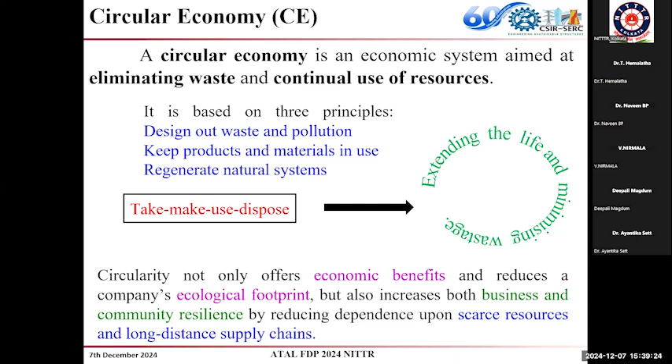The next point is how we can extend the life or keep resources alive. If we are able to do this, we can move towards the circular economy. The difference between linear economy and circular economy is: in linear economy, we make, use, and dispose it, which leads to huge waste generation. In circular economy, by all means we want to reduce waste and extend the life of the structure or material. That is the difference between linear economy and circular economy.

Circular economy as a term is only new, it is not a new concept. Whatever we have, like dress, chappal, utensils, if it goes bad, we used to try to repair it and use it. Plastics and other materials are recycled and made into different materials. So there is no newness in the concept, only the term is new.

But circular economy is a little beyond recycling. In linear economy, it is take, make, use, waste - it goes as waste. In recycling economy, it is take, make, use, and at a certain stage it can be recycled, extending the life of the material or structure to some extent. Whereas in circular economy, there are many concepts in which the material can be in use for a long time.

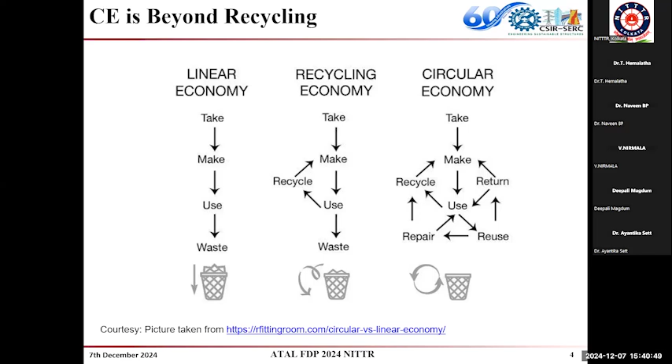If we go to the next slide, we can see what I mean by circular economy. In a recycling economy, it is only recycling. In circular economy, the material or structure can be in use through different means - like when materials are recovered after the end of life of products, and made into another material through recycling. Another term is remanufacturing, where disassembling happens at the component level, then it can be assembled again to become a new product.

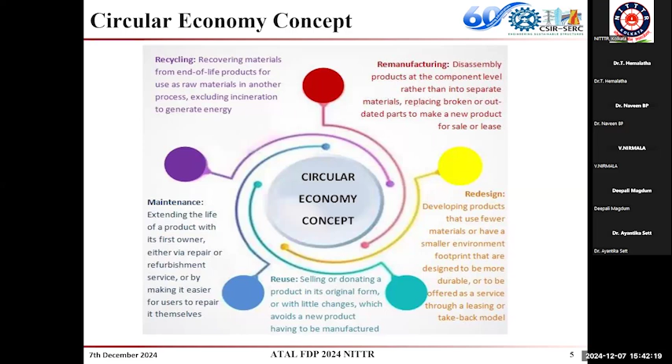Different concepts are in use now - redesigning, reusing, and maintenance, refurbishment, remanufacturing. These are some of the terms. There is a very narrow difference between each of them, and repair - everything comes under circular economy. The entire concept is, instead of just throwing things out, whether it can be recycled, reused, or repaired, the life of the material or structure can be extended. This is the main idea of circular economy.

In modern days, if you ask your parents or grandparents, if something went bad like TV, shoes, dress, or electronic gadgets, earlier we used to repair and use it. But nowadays, instead of repairing, we go for a new purchase. This happens for two reasons: one, nowadays the volume of manufacturing is high and affordable, so the cost is affordable, and repair is costly.

The skilled labor for repairing products is very less. It is like vice versa - we are not encouraging repair, so the skills for providing repair are less, and because skilled repair people are not available, we are not going for repair. So it is vice versa.

What happens is, not only are we spending more money on buying new materials, but if we consciously see, we are generating more and more waste. Ours is a most populated country, and we don't have space just for dumping waste. So the circular economy concept is very much useful, and we have to follow it in a developing country like India to convert waste as a resource.

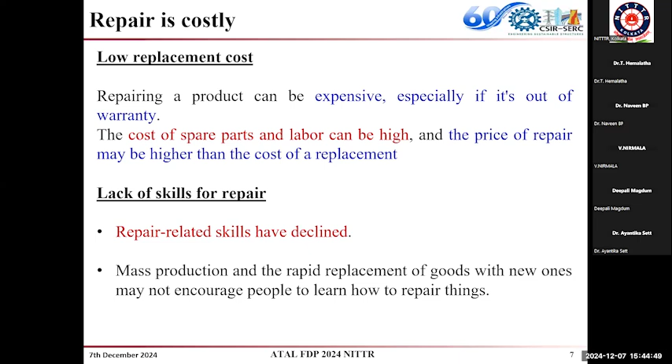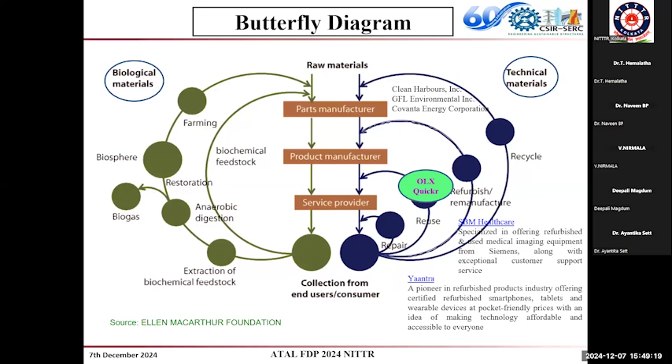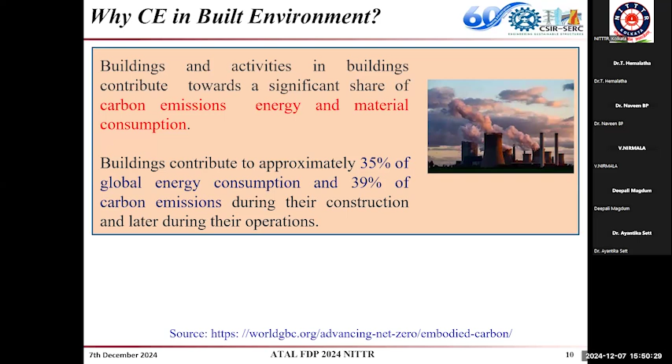So why circular economy is very important in built environment? Because buildings and the activities of buildings contribute towards a significant share of carbon emissions, energy and material consumption. Buildings contribute to approximately 35% of global energy consumption and 39% of carbon emissions. That is why, as a structural engineer, I have to say that we are more devastating to the environment, because construction industry, or concrete industry in particular, is contributing to waste generation as well as higher amount of emissions.

Concrete is the second largest material consumed in the world next to water. If you see the ingredients of concrete - cement, fine aggregate, coarse aggregate, water and steel - this is why I am saying concrete industry is contributing more towards environmental degradation. These are the conventional ingredients required for making concrete.

Nowadays we have different special types of concrete where we add other new materials for getting required functions. First, if I take cement, almost for manufacturing 1 ton of cement, it produces around 1 ton of carbon dioxide. And India is the second largest producer of cement, so we can imagine how much carbon dioxide emission is created only by the cement industry.

Coming to fine aggregate, the conventional fine aggregate is river sand. Nowadays we have alternate fine aggregates like manufactured sand, because we are running out of river sand. I'll show slides of how sand mining has devastated the environment. Similarly, coarse aggregate is quarried from mountains, so each ingredient of concrete contributes to environmental degradation. With attention to all these ingredients, we have started using Portland Pozzolana cement, slag cement, and other materials in terms of moving towards circular economy.

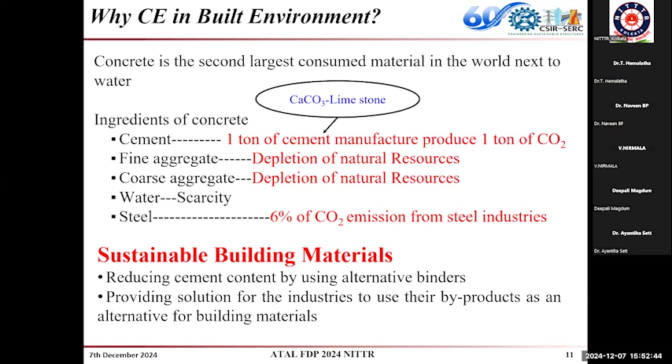So this is to show that industrialization is giving CO2 emission and also generating waste. So these are the two major problems of the industry. And if we take the built environment, steel making produces around 6% of CO2 emission, whereas cement manufacturing 8%. So India is the fourth largest emitter of CO2 and second largest producer of cement and steel.

So when we are able to find an alternate for ordinary Portland cement, then we can reduce the carbon dioxide emission coming out from the cement industry. So now, as I said, this concrete is made up of fine aggregate and coarse aggregate. Have you ever thought what is the origin of the raw materials going into construction? It all requires mining, logging, and other processes.

So why we have to worry about the built environment is because the construction industry is responsible for over 30% of extraction of raw materials and at least 25% of the waste in the world. And when buildings reach the end of life, only 40% of the material is recycled and reused. So we should be aware of the problems coming from the construction or concrete industry, and which can be altered, which are in our hands to reduce this kind of

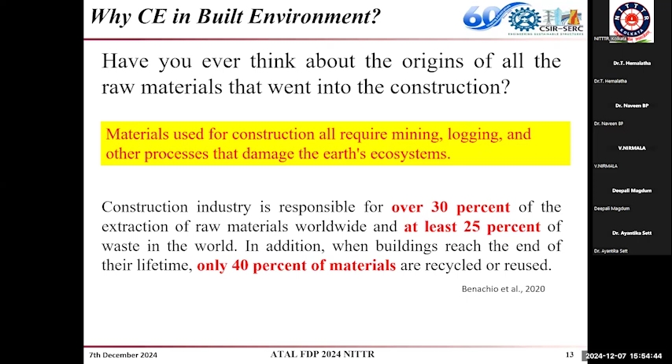degradation to the environment. In a concrete, around 70 to 80% of the volume is occupied by the aggregate, both fine and coarse together, and both fine and coarse aggregate are from natural resources. So this is just to show how we are degrading the environment or natural resources by mining sand.

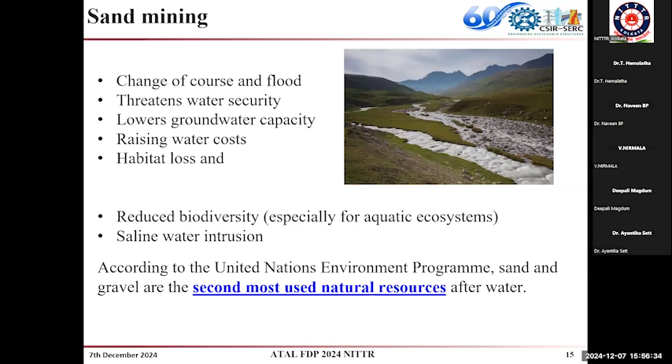So they have mentioned that whatever climatic change we are facing now, floods in many places, landslides, extreme hot and extreme cold weather conditions, is all because of this devastation of natural resources. Here they have given an example that the weather pattern has changed, from the day of onset of monsoon to the day of its withdrawal. Earlier it was 101 days in 1973, whereas it became 25 days in 2009. Similarly, the total number of rainy days has declined from 60 to 80 days per year to 18 to 30 days.

This is because, as we have studied in geography, the location of mountains is important to get rainfall. So when we are quarrying for aggregates, exploiting the mountains, then we are ending up with extreme hot weather and cold conditions.

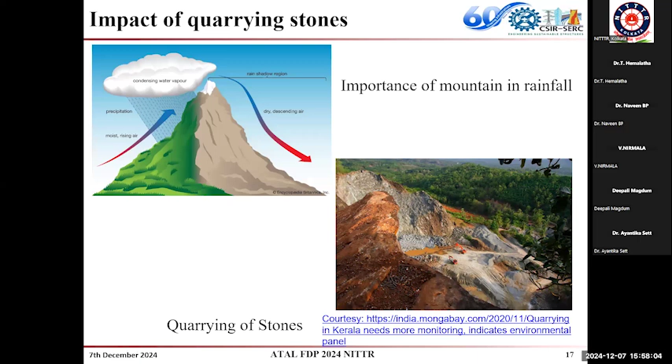So with this, I'll move on to the work we are doing towards the circular economy. Here I have taken an example of building construction. Once its service life has ended, we go for demolition, and the demolition waste we are just landfilling. So this is what happens in a linear economy. Whereas in a circular economy, at the end of the service life, the building is demolished and converted into recycled material.

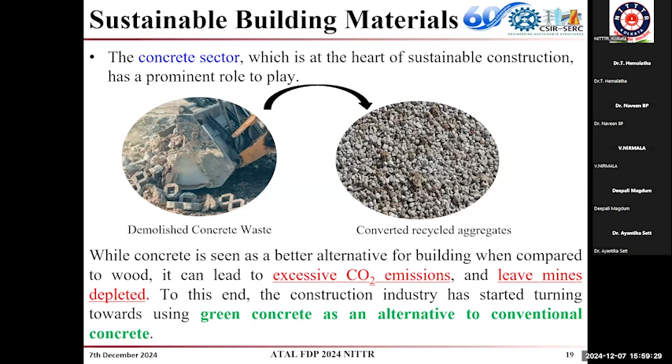So now we are having recycling units, but the number of units is very less. We have to go far away to do the recycling of materials, or bring acceptance of recycled materials in place of conventional fine or coarse aggregates. So we have to move towards developing green concrete as an alternative to conventional concrete to reduce the CO2 emission and the depletion of mines. And this is one data from the Netherlands.

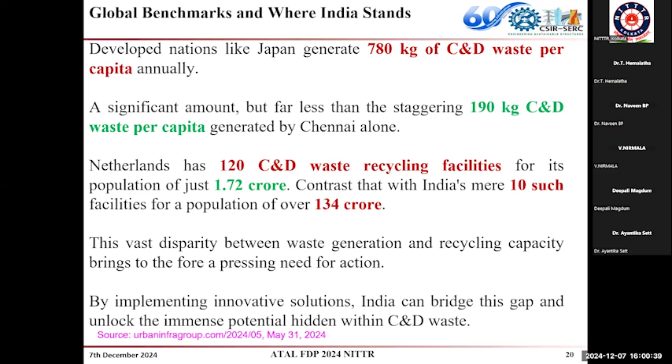But considering the depletion of natural resources, we are running out, and we can expect a huge demand for coarse and fine aggregate in future. So in that case, we are left with options like recycled aggregates. So we have started some work recently. We have a project on recycled aggregate.

And this slide shows the different areas we are working on towards the circular economy. One is the development of alternative aggregates. We have tried copper slag, fly ash aggregates, recycled aggregates as an alternative for fine and coarse aggregate. Similarly, alternative binders: high volume fly ash, geopolymer, GGBS, that is ground granulated blast furnace slag, etc.

Then coming to the second item, that is reducing the production of waste. It is by thin section structures and reuse structures. SERC is working in this area also. And coming to the third one, it is maximizing the value of recovered materials throughout all stages of the program. So prefab construction, and we are working on durability, repair and rehabilitation to extend the life of the structure.

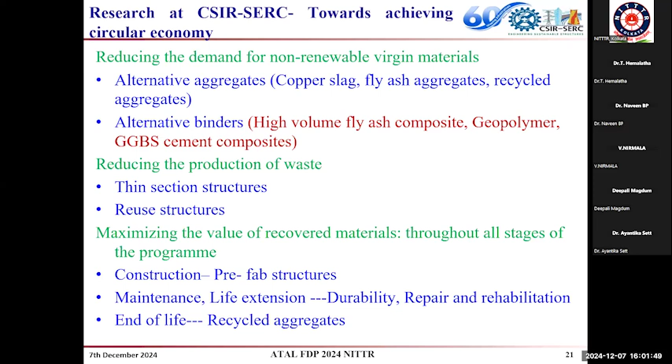And as I mentioned, when we are using industrial byproducts as an alternative for conventional material, we have developed different types of special concretes, especially by using one or more industrial byproducts. These are some of the types of concrete we are working on, like recycled aggregate concrete.

So from the construction and demolition waste, we are researching both recycled fine aggregate and coarse aggregate, and fly ash. In India, we have around 145 thermal power stations. So you can imagine the quantum of fly ash generated in each thermal power station. Now, after so much effort, the utilization of fly ash has got good acceptance by the cement industry because of the benefits. I have a few slides to show the research work carried out using fly ash.

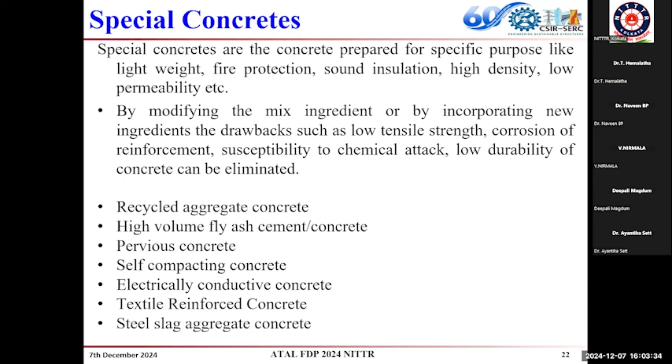And other types of concrete like pervious concrete, self-compacting concrete, electrically conductive concrete, textile reinforced concrete, steel slag aggregate concrete. So in each and every type we tried to use at least one industrial byproduct as an ingredient for developing special concretes.

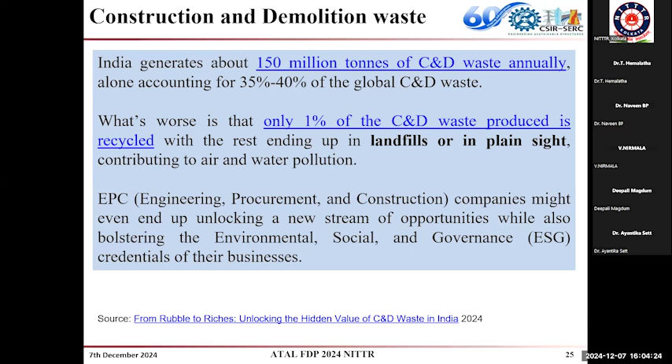First, let us see some work which we have carried out on recycled aggregate. This is the data where we are only using 1% of the C&D waste produced. Everything goes to landfill. And India needs to add 700 to 900 million square meters of commercial and residential space every year till 2030. So we can imagine how much C&D waste we are going to produce.

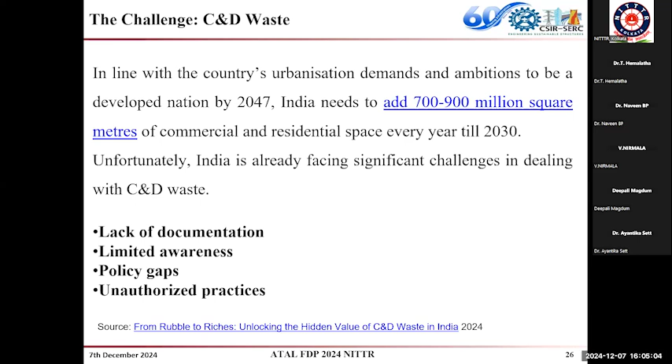So when we are using recycled aggregate, it may have two interfacial transition zones: one between the aggregate and the old mortar, and, when this aggregate is used in new mortar, the transition zone between the already adhered mortar and the new mortar. Generally the interfacial transition zone is the weakest zone in the concrete. It creates problems like cracking. So when we use recycled aggregate with two interfacial transition zones, it further weakens the concrete. This is the disadvantage of using recycled aggregate.

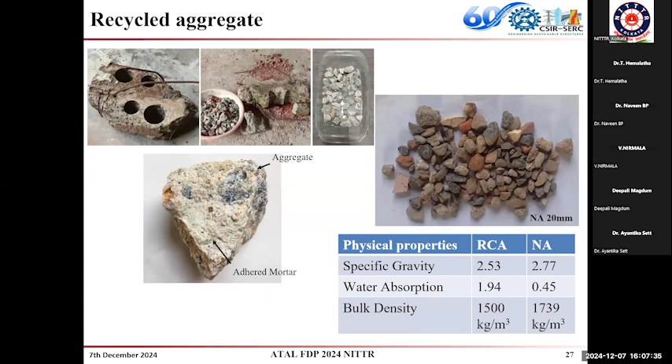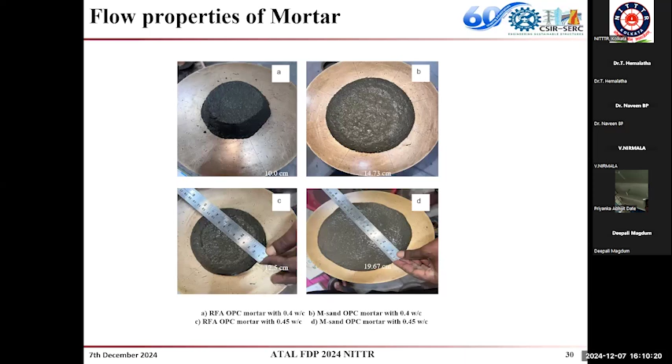When we use recycled fine aggregate, we can see that the flow is affected because, as I mentioned in the earlier slide, it has a combination of different types of materials. The water absorption and other properties differ, and it is reflected in the flow as well as the strength properties. So this is for recycled fine aggregate.

Then when it comes to the strength result, here we have used both river sand as well as M sand to see what happens when we make changes in the replacement level, because when we are using new materials, we should know up to what replacement we can go, whether 100% replacement or partial replacement, without affecting the strength as well as durability properties. So we have seen whether recycled fine aggregate can be used instead of M sand or river sand.

From the strength result, we have observed that there is no problem with the strength, even though it has a problem of water absorption, but it is within the range of what the code specifies. So that is reflected in the strength. And another observation is that it is not affecting the 28-day strength, but it is affecting the early age strength. So if we want to use it for such applications, we have to give attention, or modify it with some other material so that early age strength can also be achieved.

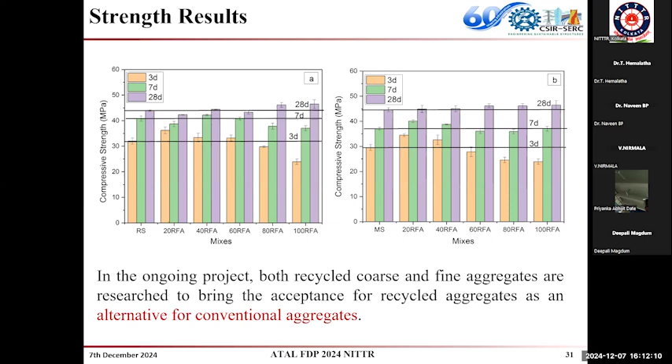So these are some of the research which is going on, and we are parallelly doing other tests also for confirming the durability of both the recycled fine as well as recycled coarse aggregate.

Now let me move on to another industrial byproduct we are using for our research. At SERC we have done a good amount of research with fly ash, and we have a building which uses 40% fly ash. It was constructed in the 1970s itself. And as I mentioned, we have huge resources of coal-based power stations, so we have more fly ash generated. Nowadays, there is understanding of the importance and benefits of fly ash in cement. As I mentioned in the earlier slide, cement industries are the major contributors of CO2 emission.

So if we are able to reduce the cement consumption in concrete, then we are contributing towards the circular economy for net zero emission. So we are getting the dual advantage when we are using fly ash in cement. One is cement consumption is getting reduced. That depends upon what amount of fly ash we are using. Our Indian code suggests that we can go up to 35% of replacement.

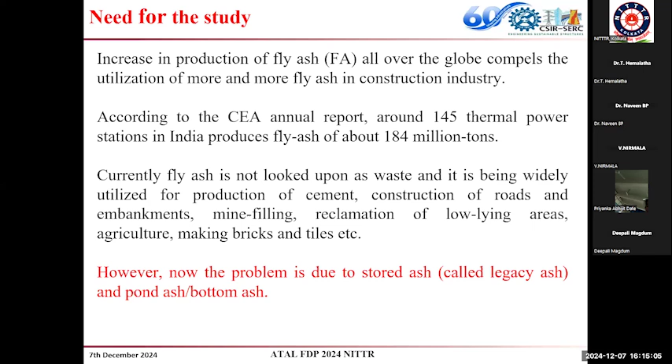Now coming to the benefits of fly ash: because it has spherical particles, it improves workability and impermeability. The size of the particles provides good impermeability to the concrete. And in mass concreting, when we add water to cement, it is an exothermic reaction and it generates a huge amount of heat. So in mass concreting, the incorporation or replacement of fly ash in the cement helps in reducing the heat of hydration. So many things like thermal shrinkage and cracks can be avoided by using fly ash as an ingredient.

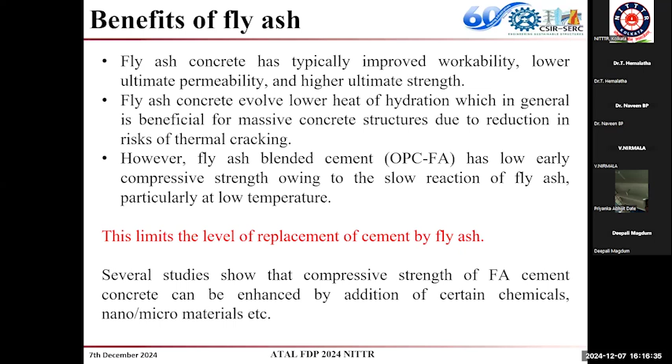As I mentioned, the code has mentioned a replacement level up to 35%, but nowadays there is so much research, and at CSIR-SERC also we have research to see what happens if we go beyond 35%, and if strength is reducing, how that can be compensated. We want to use beyond 35% of fly ash, so that kind of study also we have attempted.

When fly ash is used, it has different roles. As I mentioned, the particles are spherical in nature. So it has a dilution effect, filler effect, and lubricating effect. Whenever we use some new material, either a virgin material or an industrial byproduct, there are two kinds of properties affecting the strength, durability, or any other properties. One is the inherent properties, like its shape, size, composition, etc. Then there are external factors like the type of curing, the method of curing, the temperature, water to binder ratio, all those things.

So when we use any new material, we have to give attention to this. We have to do basic characterization studies to understand the physical and chemical properties of the material. Then the material can be used appropriately. The optimum replacement level can be judged based on the inherent properties of the material.

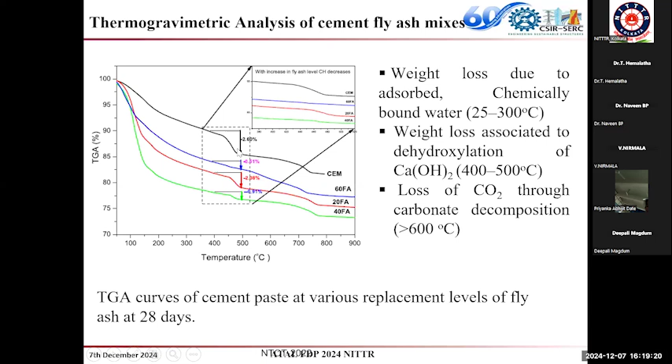Similarly, here what we have done with high volume replacement: if we see 20% replacement, and we add CF, a chemical admixture, that is calcium formate, we see how it improves the formation of calcium hydroxide.

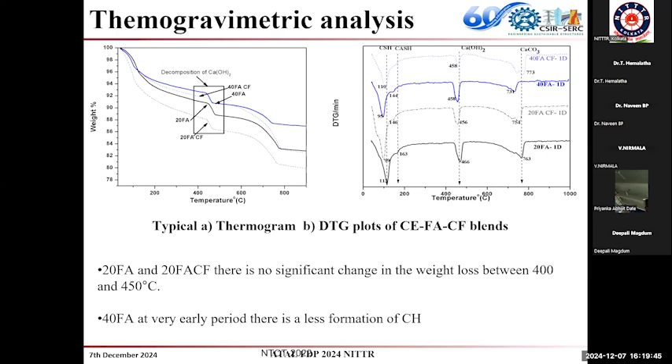And this is just to show, I have given very few results here just to show how, when cement is slowly replaced from a low replacement level to a higher replacement level, it is affecting the cement hydration as well as the strength properties.

So we have carried out elaborate tests using different types of chemical admixtures and some wastes like eggshell powder and lime sludge from the paper industry. All those things are used as a calcium source when we are going for high level replacement of fly ash. This type of studies we have carried out.

So those who are interested and want to know more about that kind of studies, I have given the list of papers we have published. You can refer to that in detail.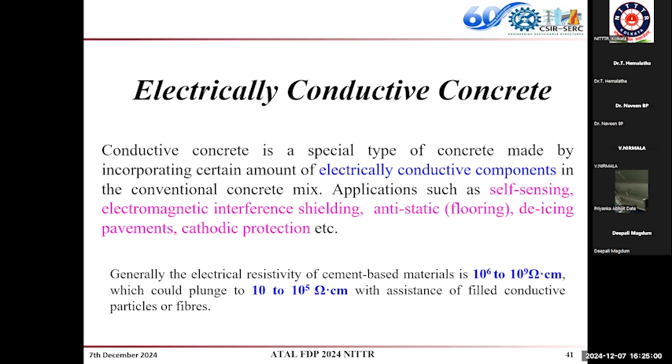Generally, electrically conductive concrete is made using carbon nanofibers, nanotubes, graphite powder, steel fibers, all those things. In this particular project, we checked whether some industrial byproducts can be utilized for developing electrically conductive concrete. As I mentioned, whenever we want to use a new material, we have to characterize and understand the material first, its composition, physical and chemical properties. Then based on that, we can identify material for a particular function and application.

So here our aim is to get conductivity. In the conventional materials, carbon fibers and nanofibers with high carbon content provide conductivity. So we have to look for byproducts which have conductivity. Copper slag and steel slag have a good amount of Fe2O3 content. So first we made some trials to see whether incorporating this slag improves the conductivity, and it was improving the conductivity.

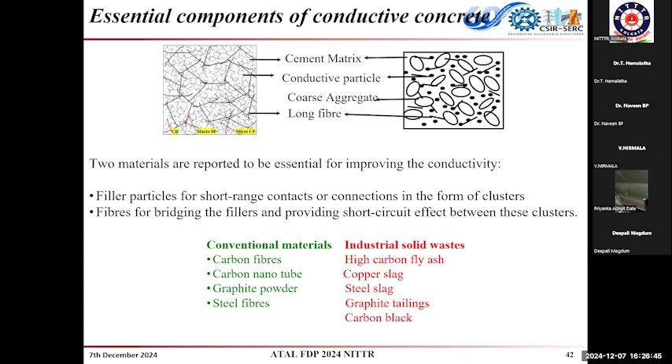Carbon black is an industrial byproduct from the petroleum industry, and bagasse ash has high carbon content, depending on how the combustion procedure has happened. Rice husk ash, bagasse ash, and many other biomass ashes have high carbon content, and this can be utilized for bringing new function to the concrete.

We have carried out these studies for developing this special concrete. As mentioned, we fixed two criteria: presence of unburnt carbon content and presence of iron oxide. These two help in improving the conductivity.

We have taken many industrial byproducts and tested the unburnt carbon content using loss on ignition, and the presence of iron oxide Fe2O3 content by chemical composition. Based on different materials chosen, we carried out element oxide tests to find the element oxides. Fe2O3 content is high in many of these materials.

If you see the copper slag, it has around 60% Fe2O3 content, so it was actually providing good electrical conductivity.

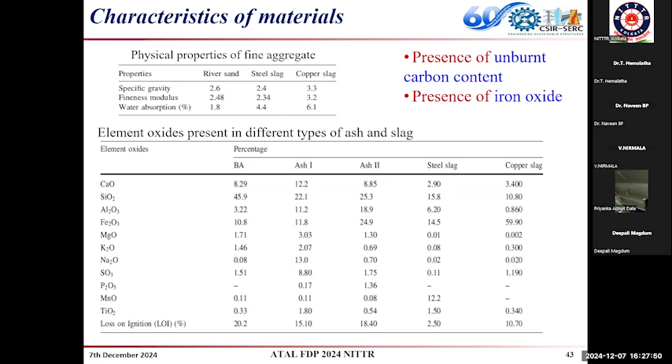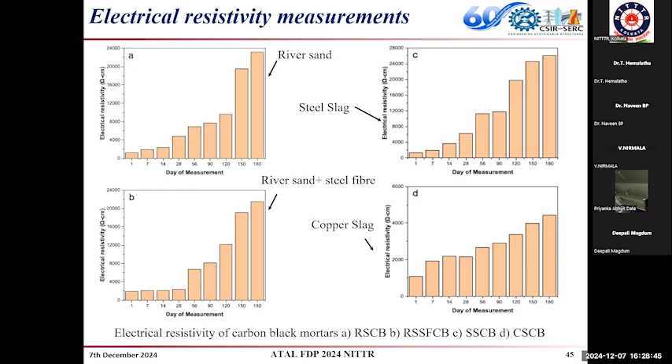So for developing this kind of special concrete, copper slag is a good ingredient. Based on that, we used copper slag as fine aggregate in this type of concrete. When we use 3 different types of aggregates, copper slag is the one having the low electrical resistivity.

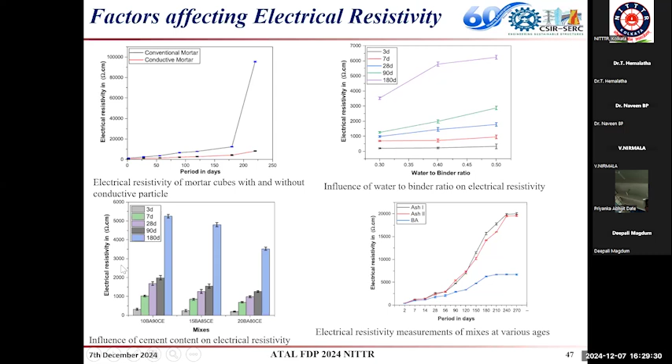This shows the electrical resistivity of mortar cubes with and without conductive particle, how water-binder ratio influences resistivity at various ages from 0 to 270 days, and how cement content, when replaced with bagasse ash, influences the electrical resistivity.

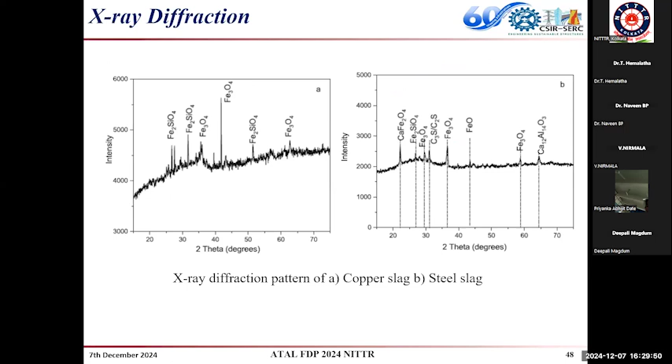This is with 2 different types of slag - we used copper slag and steel slag. Fe2O3 content, that is iron oxide content, is in different forms providing resistivity. This knowledge we can receive by characterizing the material.

When bringing special functions to the material, when we want to develop a new concrete, the concrete always has to be used in construction. So by adding some different type of material, it should not affect the strength of the material. The minimum strength has to be maintained - for structural concrete, the code specifies M20, that is 20 megapascal strength needs to be achieved. This should not be compromised when using industrial byproducts for special functions.

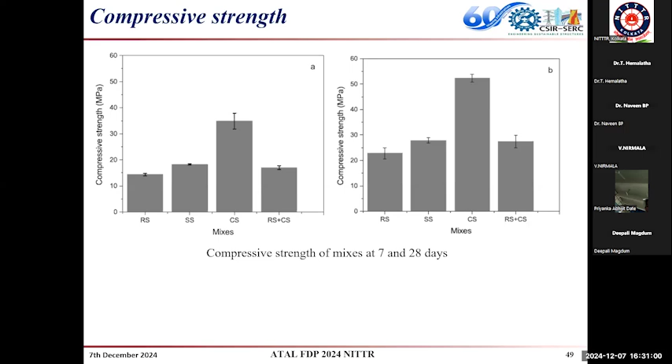So we have to check whether the material provides the intended functions and also verify it is not compromising the strength. This testing we have carried out for this special type of concrete, and we have also published this. If you want more details about this type of concrete, you can refer to our literature.

Now I'll move on to the next type of concrete, and how it contributes towards circular economy. There are 2 ways it contributes to circular economy. One is this material, textile reinforced concrete - it has textile as reinforcement, so there is no steel required for this kind of concrete. These textiles are non-corrosive in nature, and we can make very thin sections out of this textile reinforced concrete.

Here the ingredient for textile reinforced concrete doesn't have coarse aggregate, so we can make sections even from 10 mm thickness. This textile reinforced concrete can be made at 10 mm thickness without compromising strength, so this contributes towards circular economy by minimizing the material needed.

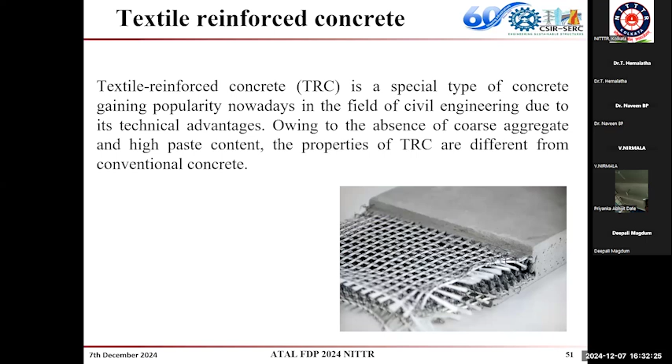Another thing is it is non-corrosive in nature, so the life of this kind of concrete can be extended, or the durability is high. These are some of the TRC applications.

The first and second figures are from our lab, and these 3 are from the internet, just to show that we can make thin structures out of it, and what we can make out of this textile reinforced concrete - like wall panels, door panels, all those things.

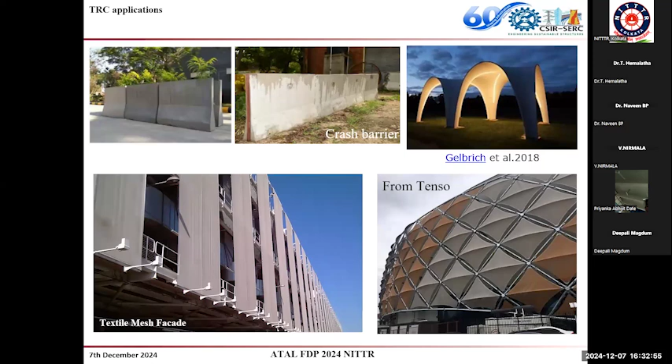As mentioned, it doesn't have a coarse aggregate - it has fine grained material, and it needs a different type of proportion.

Whenever we develop a new type of concrete, the basic ingredients may be the same. Sometimes we need to add some new material for bringing some new functions, as I mentioned in the earlier type of concrete, electrically conductive concrete.

Sometimes just by proportioning the conventional materials in a different way, like self-compacting concrete, it can be made without adding any new material, but here the fine and coarse aggregate will be less. The paste content will be very high for providing flowability to the concrete.

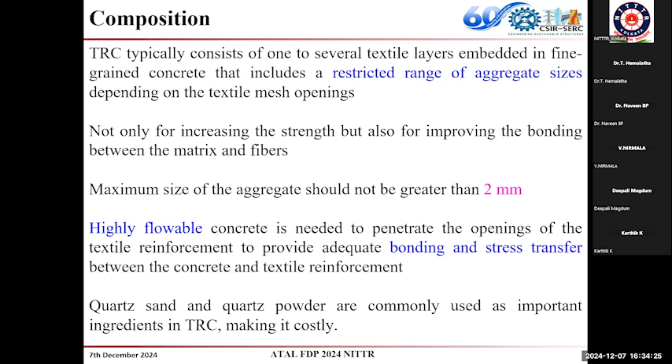So for each and every new type of concrete, we have to keep in mind that we should change the proportion accordingly. In this case, there is no coarse aggregate, and the maximum size of the aggregate should not be greater than 2 mm, because we have to maintain the integrity between the textile fiber placed along with the matrix.

So these are some of the different types of textile fibers available in the market, like alkali resistant, basalt fiber, carbon fiber, aramid fiber, etc.

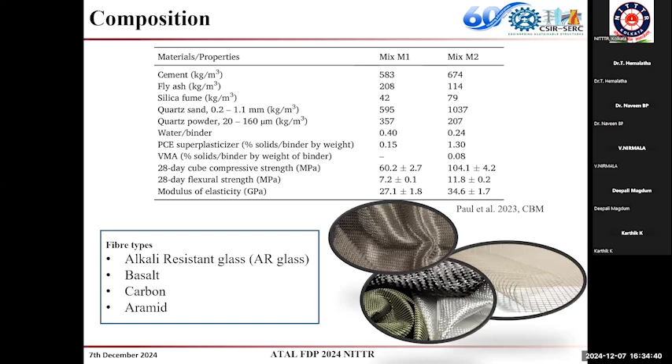Earlier it was using only quartz powder or quartz sand, but that was very costly previously. Now it has been reduced because we have replaced that quartz powder and sand with river sand.

So the number of layers depends upon the requirement - what tensile property we have, what flexural behavior we are expecting from this particular type of textile reinforcement. We can increase the thickness from 10 mm to 30 mm, 40 mm, whatever it is, and depending upon the requirement, we can keep one or more layers of the textile reinforcement.

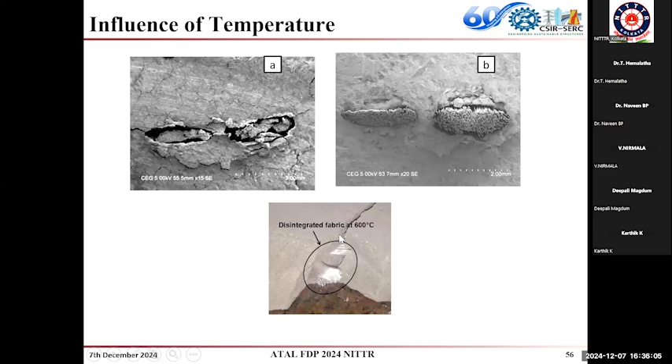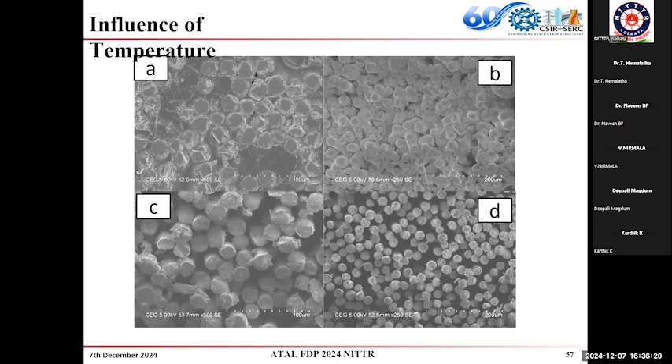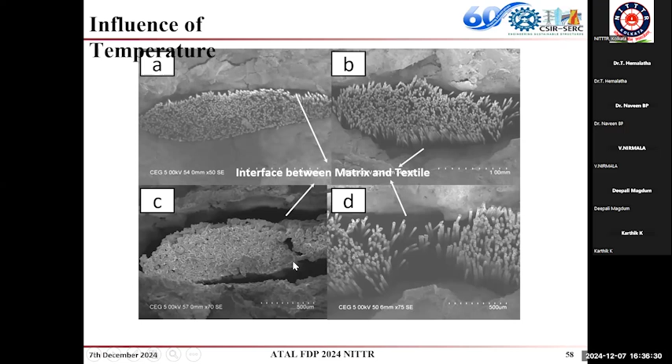And here we have carried out studies to see when it is subjected to high temperature, how it is disintegrating, because it is having a layer of fibers. This shows that after around 600 degrees, the fibers are getting disintegrated. These are other studies showing how this disintegration happens under scanning electron microscopy, how the fiber bundles are affected when subjected to high temperature, and how the interfacial transition zone is getting affected when subjected to high temperature.

And we have carried out the deflection test with various thicknesses of the specimen, subjected to different exposure conditions, like different pH conditions, to see how acidic and alkaline conditions affect it. Because the matrix is rich - if you see the composition of textile reinforced concrete, it is very rich - it is not supposed to affect the fibers under different exposure conditions. So we have subjected it to acidic as well as alkaline conditions.

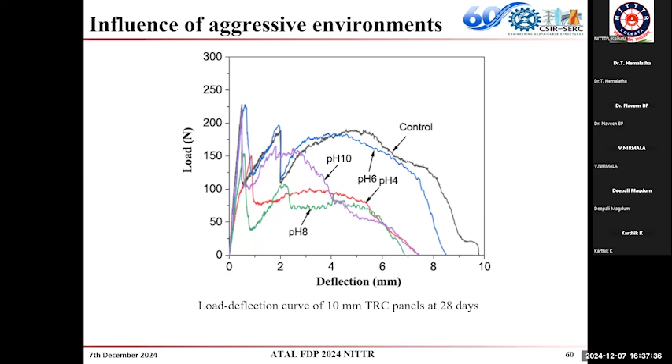So we have tested for different thicknesses. It was showing that it had good resistance to water permeability as well as being alkaline resistant, and this also we have published. So if you want more details, you can go and refer to our literature on TRC.

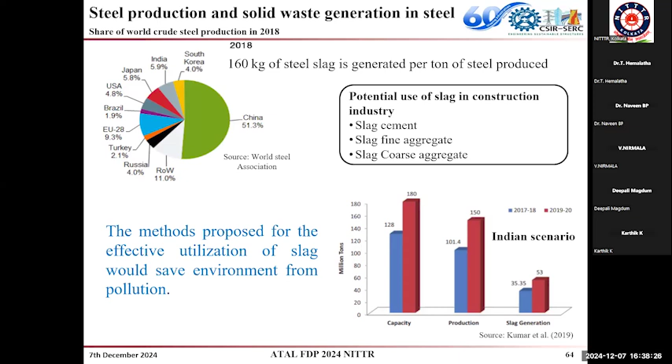Another thing is steel slag concrete. What we have done here - an industry came to us because steel slag, unlike ground granulated blast furnace slag, this electric induction or furnace slag is not used by the cement industry. So they came to us to ask whether this could be used, because they have a huge pile of slag stored in their industry and wanted to convert that slag into some useful material. So this way we have contributed towards the circular economy by converting this slag into fine aggregate.

So this is the slag boulders, and this has been crushed and sieved under a 2.36 mm sieve. This fine aggregate is called slag fine aggregate after crushing, and this slag fine aggregate is used instead of conventional river sand.

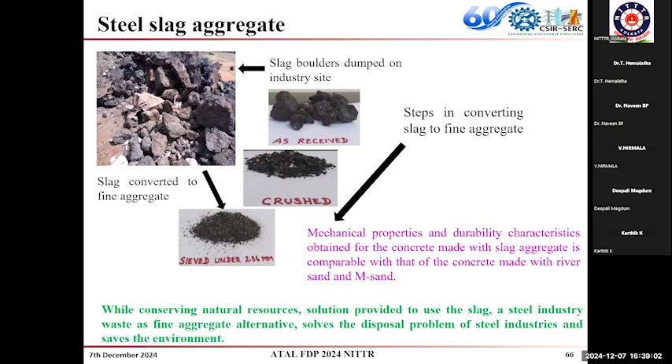So we have compared how it behaves when river sand is used versus when slag sand is used. Three different sands were taken: M sand, normal sand, and slag sand, for both OPC and PPC.

Whenever we use some materials, we have to check compatibility, because Portland Pozzolana cement, having some pozzolanic material, behaves differently. So we conducted a study for different types of aggregates with different types of cement, looking at both strength and durability.

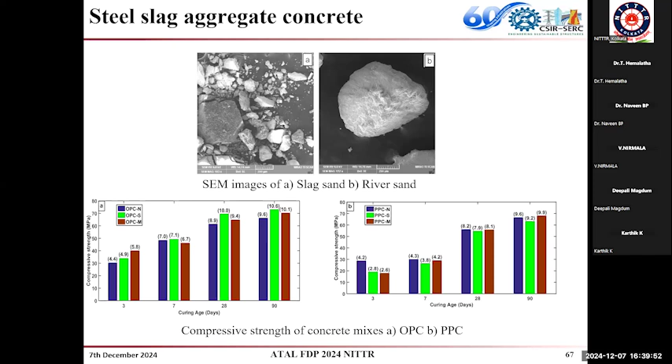When we use slag sand as a 100% replacement for river sand, it does not affect the strength or durability properties. So we have suggested this can be used as a good alternative for river sand. This is also available in literature; if you want more details, you can refer to this paper.

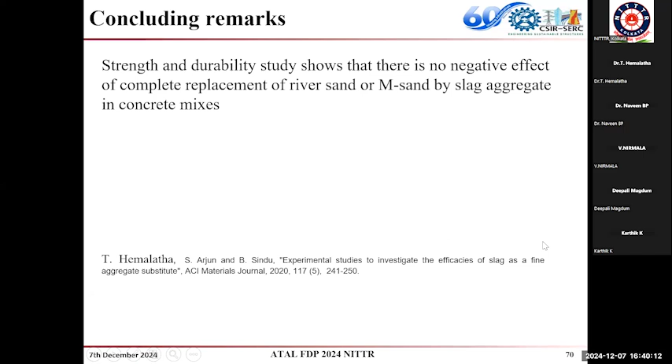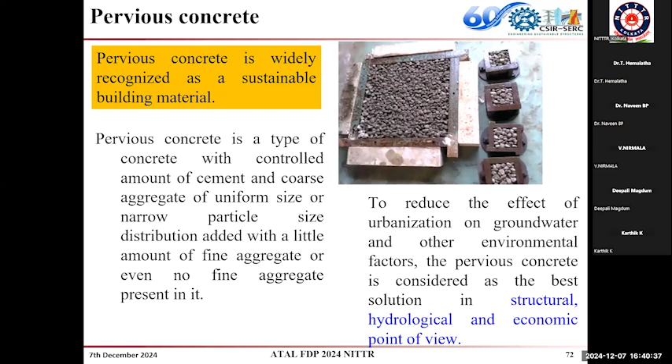Coming to another type of concrete, pervious concrete. It is made with no fines, like less amount of sand or no sand, made with coarse aggregate and cement paste. The advantage of this concrete is it is porous in nature, so it promotes groundwater recharge. If you pour water, it comes out of the other side, since it has a good amount of voids.

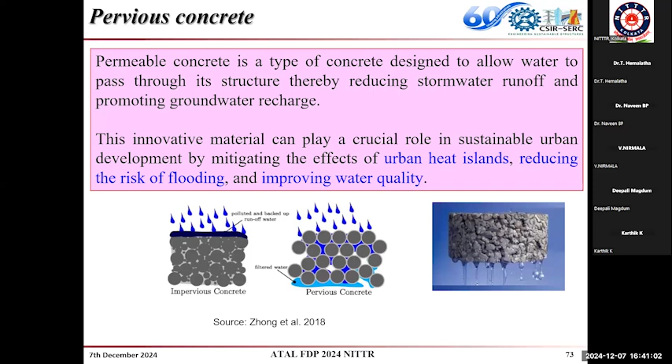As this is a different type of concrete, we need a different proportion for it. It doesn't need any sand or very less amount of sand, so whatever we made was without any sand. Here the importance is the void content. Generally concrete is designed for a strength purpose, we fix a strength like 20 or 30 megapascal and design the mix. Whereas here we have to see how much voids we need, and based on that we design the mix. So this is how it looks.

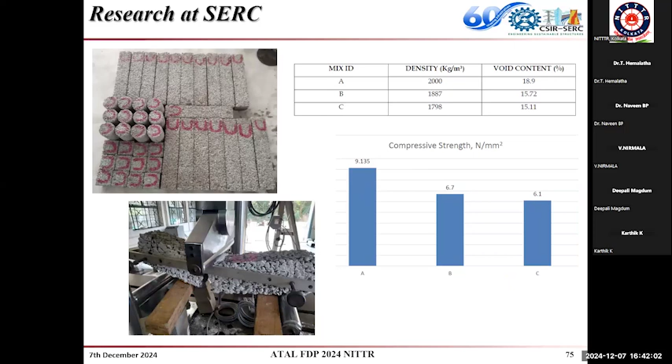This concrete is used for side walkways because it has voids, so we cannot expect more strength. The highest is around 9 megapascal, so this can be recommended only for very low traffic or side walkways. But because it is porous in nature, we felt it could be used for some architectural concrete applications.

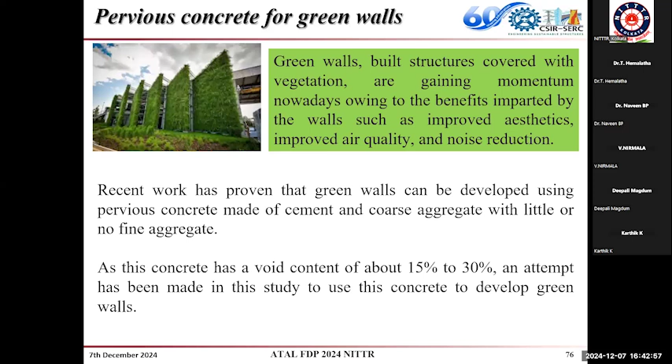Like green walls, where vegetation is grown vertically. Because it has voids, those voids can be filled with a growing medium like compost, and vegetation can be grown. This vertical green gardening has advantages: kept indoor or outdoor, it purifies air, reduces temperature, and provides noise sound insulation. So there are many advantages of keeping this kind of vegetation on a vertical wall, so why not try that.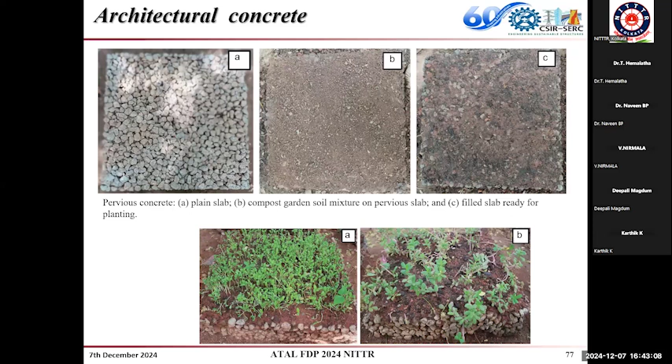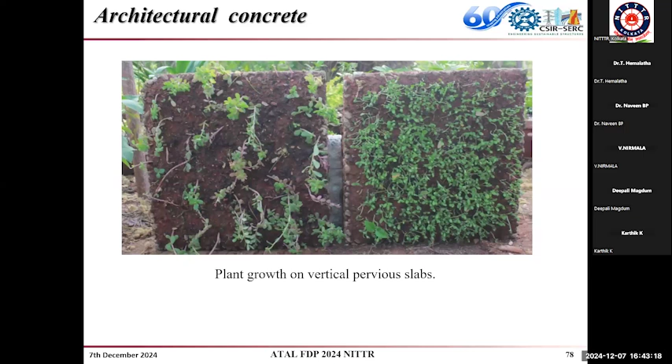So we tried filling this porous concrete with compost and growing vegetation over it. This is how the vertical slab is made with pervious concrete. We have also published this; if you want more details about this pervious concrete, you can refer to it.

So these are some of the types of concrete I would like to discuss in this lecture, made using different materials related to circular economy. As mentioned, in most of the different types of concrete we have used industrial byproducts as an ingredient. There are also other methods to achieve circular economy, like modular construction, high value recycling and reuse, and sharing space.

Sharing space means getting familiar, like we have Workafella, where instead of each company buying their own space, the space is commonly built, and used on a sharing basis for weekly, daily, or monthly rental. So the number of buildings constructed can be reduced by sharing space. This, along with 3D printing, provides faster construction, and through these different ways we can contribute towards circular economy.

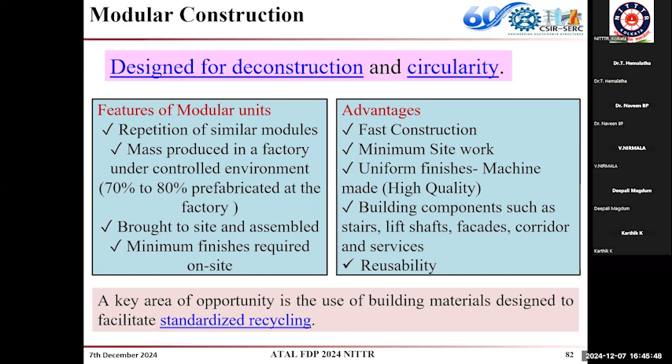So when we want a temporary structure, it is not necessary to construct and leave it or demolish it there. Now technologies are available so that when the purpose is over, it can be dismantled and used in some other place where it is needed. Those kinds of technologies are available now at component level and structural level.

So this is one live example I just want to show for circular economy. This is one building in New Delhi. They wanted to demolish it first. Then they thought about how this could be converted. Instead of demolishing, it was converted by adapting new technologies like design for disassembly, adaptability, remanufacturing, whatever I told you. So they have converted this building into a new building instead of demolishing. Now the life of this building has been extended.

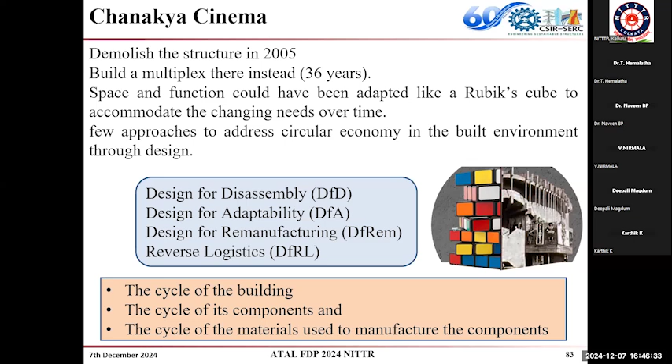So with this, I'll have a few more examples. I think I have some more time. I can show these examples of sustainable buildings.

Initially, I mentioned that the construction industry is contributing towards environmental degradation. At the same time, the concrete industry, the structural engineers and material scientists, are also contributing innovations to combat all these things. So many innovations happened in this area to bring sustainability to buildings, as I mentioned earlier, like vertical green spacing. There are so many standing examples, so I would like to list a few here.

One is the Sun Moon Mansion in China. It has a fan roof with 5,000 solar panels. In this building, they have used more than 30 advanced technologies like grid-connected power generation, photovoltaic cells, photoelectricity, sunshades, northern grilling sunshades. And they have achieved energy efficiency of around 88%.

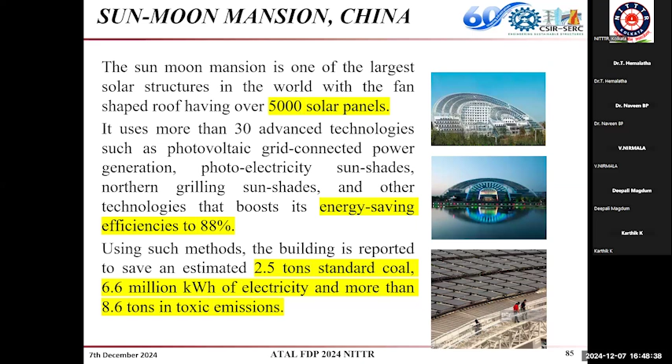And in India we have another standing example of a sustainable building, Suzlon One Earth. This campus is powered by renewable energy, including hybrid wind turbines, solar panels, and photovoltaic cells, and it conserves 35% of its operating cost. It got platinum LEED and TERI GRIHA 5-star certification, with 8% of its annual energy generated on site through photovoltaic panels and windmills, with a total incremental cost of about 11%.

These are only some examples, and throughout India we are moving towards renewable energy. Till today we have a good amount of coal resources and power generation happening with coal power stations, but we are slowly moving towards renewable energy. Even for small projects, photovoltaic panels are used in many places. In this project, they have used a good amount, and they were able to declare it a zero energy project.

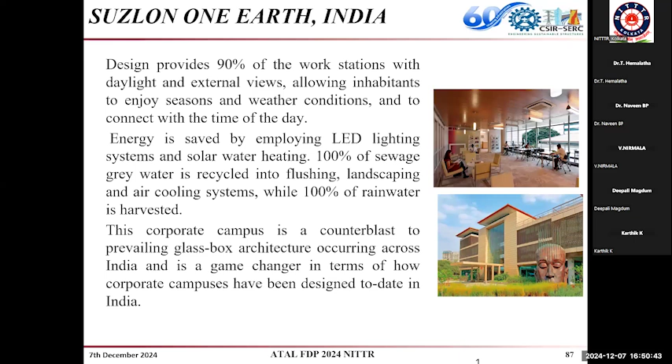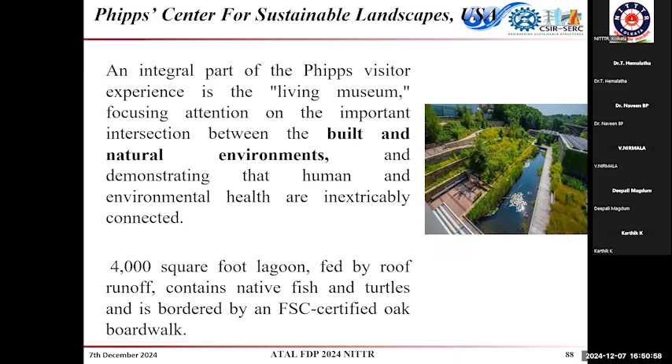And this is another example. This is like a living museum, with a 4,000 square foot lagoon fed by roof runoff. It contains native fish and turtles and is bordered by an FSC certified oak boardwalk. Here they have managed the 10-year storm through vegetation-based systems, including green roofs, gardens, and bioswales. Annually, approximately 500,000 gallons of rooftop runoff offset the conservatory irrigation demand, so no potable water has been used for irrigation since the landscape establishment period.

This achievement came just by adopting some new practices and maintenance practices apart from construction. As I mentioned, not only during construction but after construction and during the maintenance period also, buildings contribute to energy use and emissions. That can be avoided by proper planning during construction, proper maintenance, and fixing a few technologies which can save energy and water.

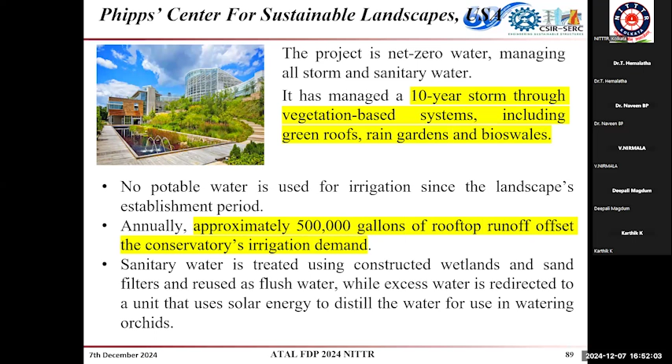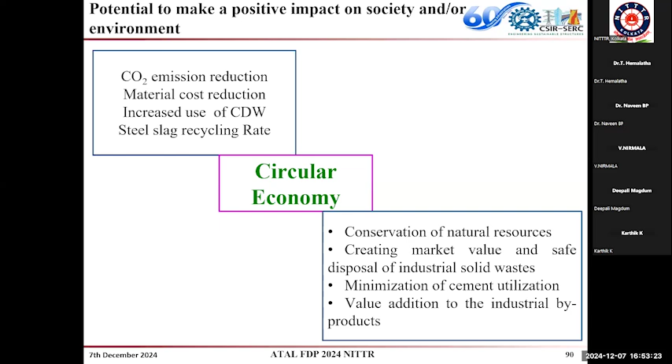And the pathetic situation in India is we are only using 1% of construction and demolition waste. So when this level of utilization is increased, then we can save a good amount of natural resources. So by adopting circular economy practices and technologies, we can save our planet, we can save our natural resources, and we can keep some resources for our future generations. With this, I would like to conclude, and thank you all.

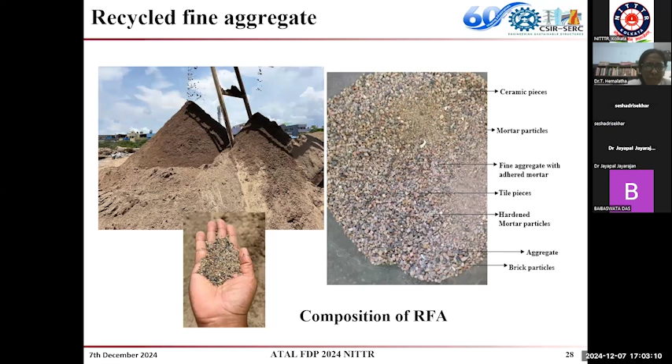This is how it is processed. Madam, when the processing is going on, I think there is a little difference from the natural fine aggregate. Yes, sir, there is. This is not equivalent to the original aggregate. It is a combination of so many things, with so many compositions.

Which kind of test do you perform on that? Pardon? For characterization. Hello? Madam, your voice was not audible for some time. Now is it audible? Yes, madam, it is now audible. Am I audible? Yeah, please go ahead.